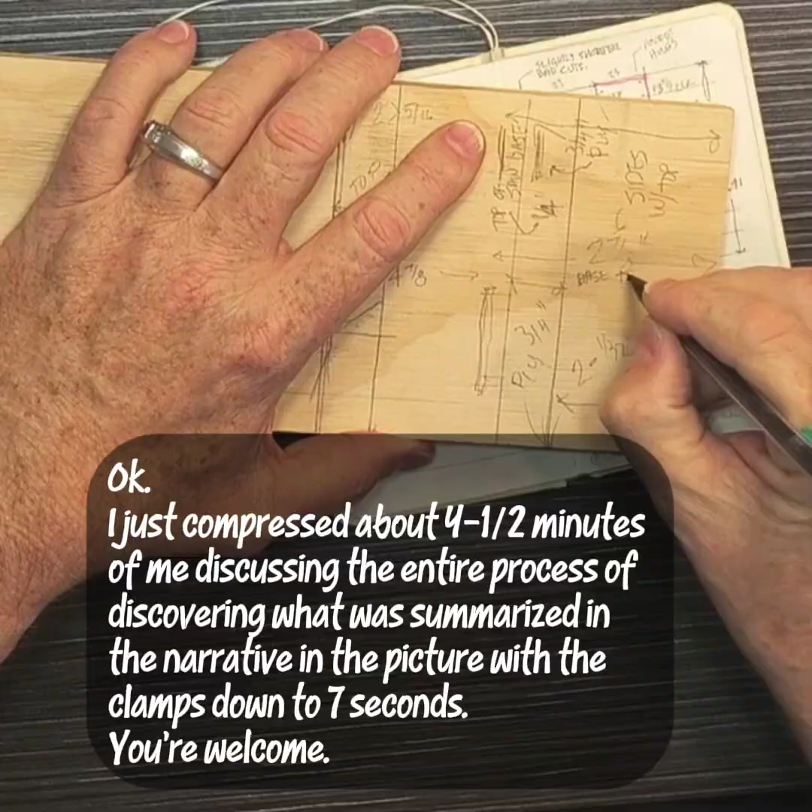This video is really just a way to show how my process moves from the measurements to a sketch, and from the sketch to what I'm going to build. So I start out with an initial base outside of 18 1/4. I'm going to add two 3/4 inch pieces to each side, so I'll end up with 19 3/4, which is plenty of room for the saw.

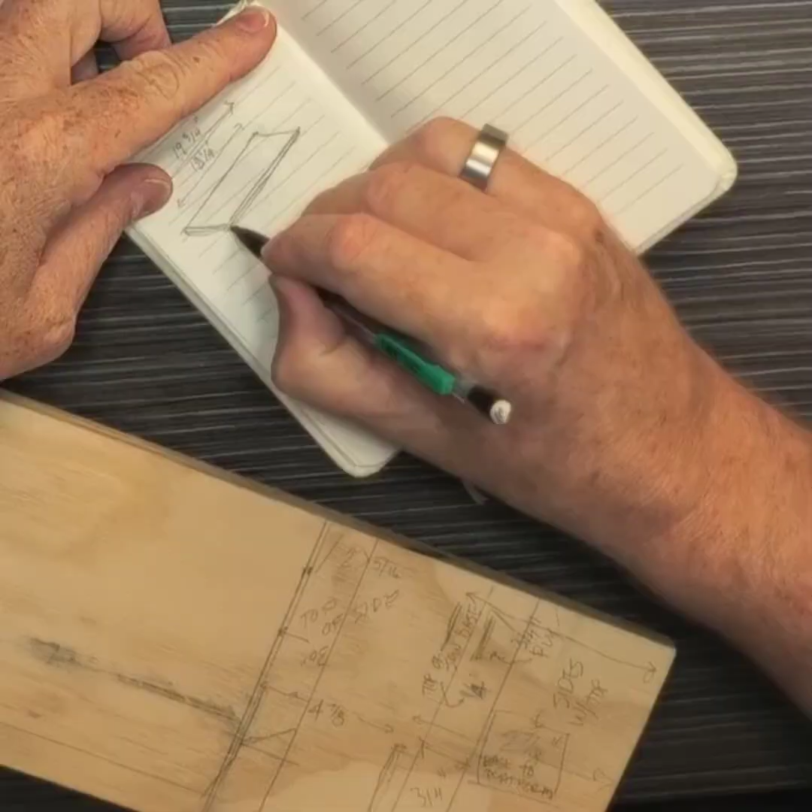What I think I'm going to do is make a piece that slides on the outside of the existing stand so I can mount the hinges to the outside, and put the base on a stand that's more appropriately 19 3/4 inches wide, plenty of room for the stand. I can bolt through into the bottom of that piece of 3/4 inch plywood, and I've got the 2 wings where I want them, right at the height of the platform of the saw.

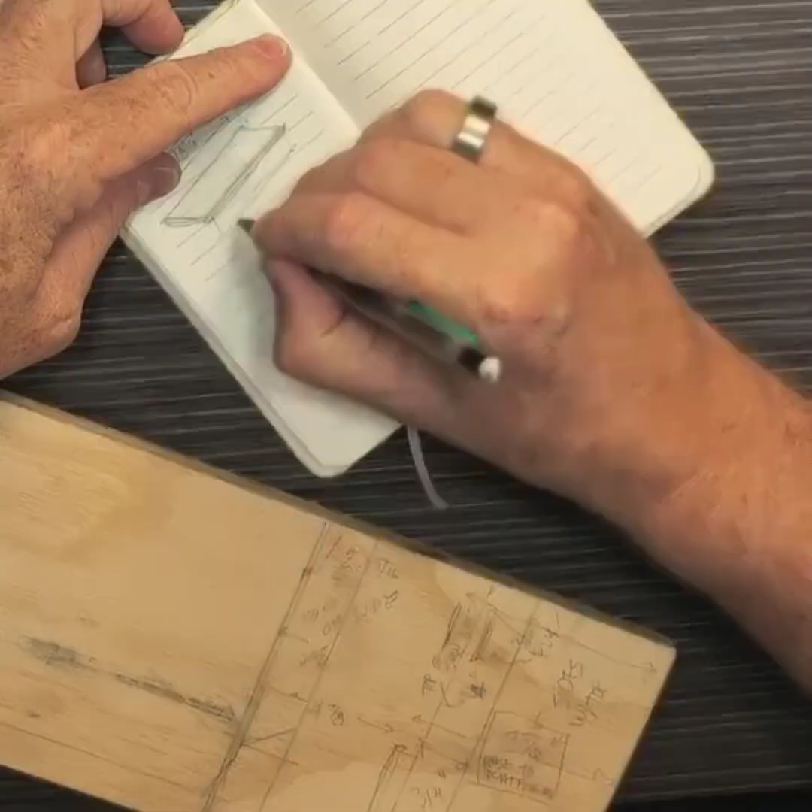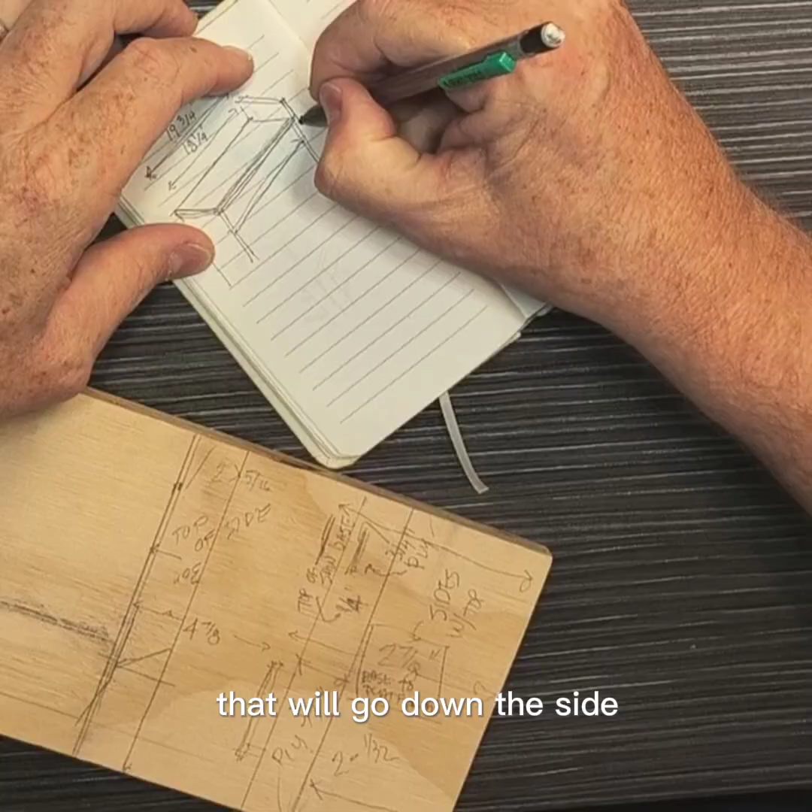I acknowledge I'll have this funny little space that's like 2 and something inches, but I can use that for maybe blades or templates or clamps or something. The sides are going to be up at about 2 7/8, or anywhere between 2 3/4 and 2 7/8. 2 3/4 is the actual dimension, 2 7/8 is a little bit higher. That gives me the ability to shim up or level up the bottom of the saw if I want to - I saw that on somebody else's build of the miter station.

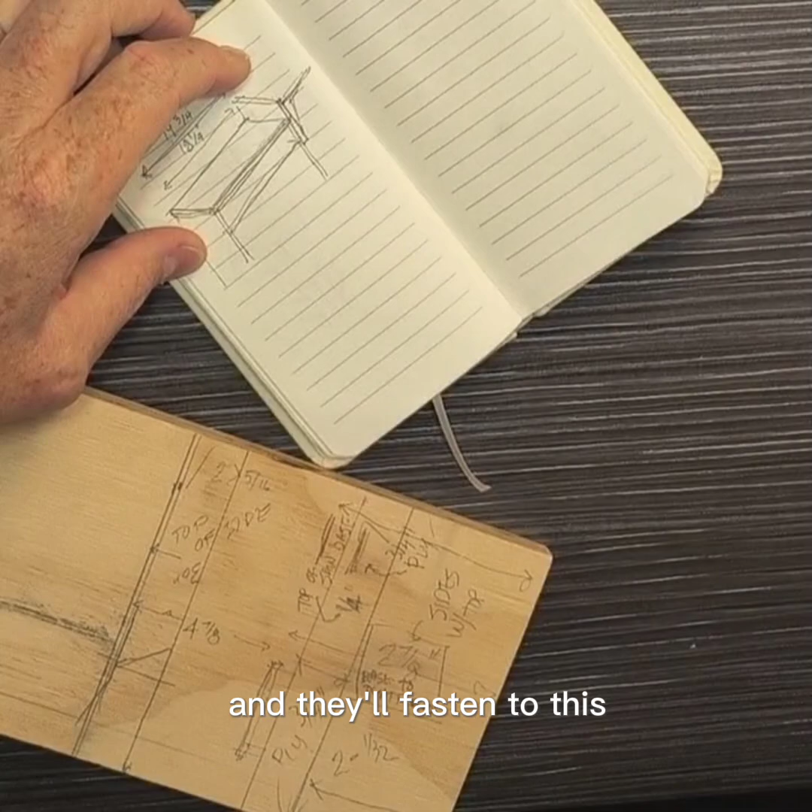The 6-inch panels on the side give me plenty of room to put my collapsible bracket hinges on. These are foldable hinges that allow me to put the wings down when I want to and leave them up firmly supported when I want to.

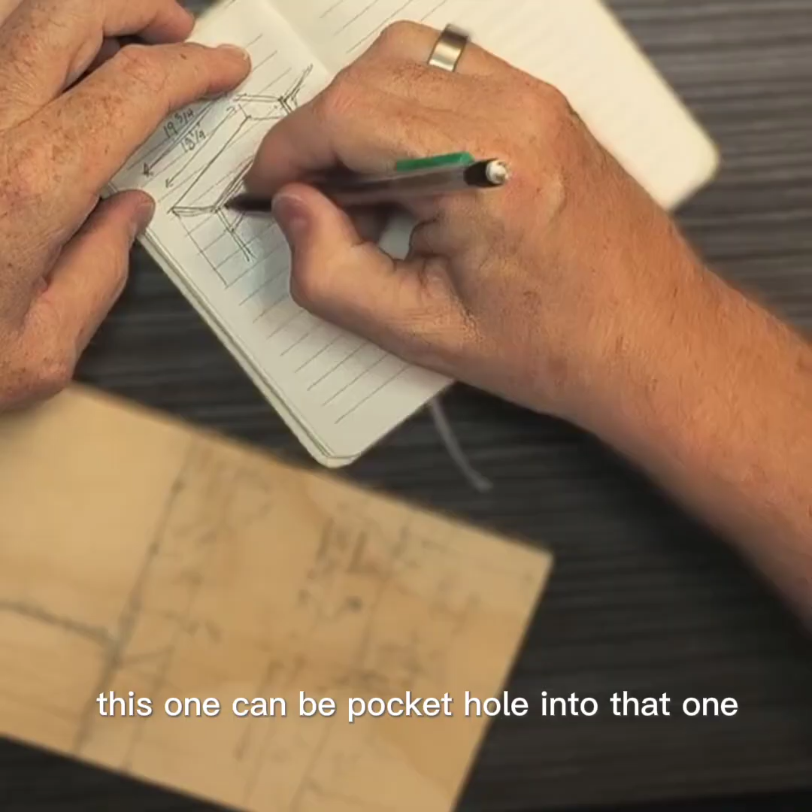I can also glue the 3/4 inch ply to the existing, giving it additional support, with plenty of room for small screws at the top and long screws at the bottom, or even a bolt through if I wanted to. So now I'm centering in on what I've got.

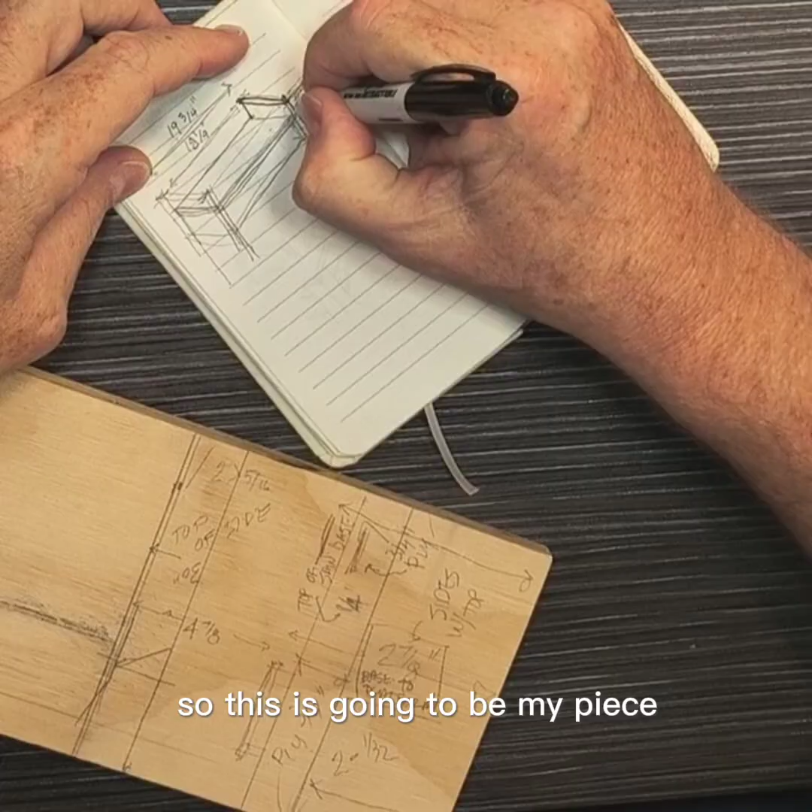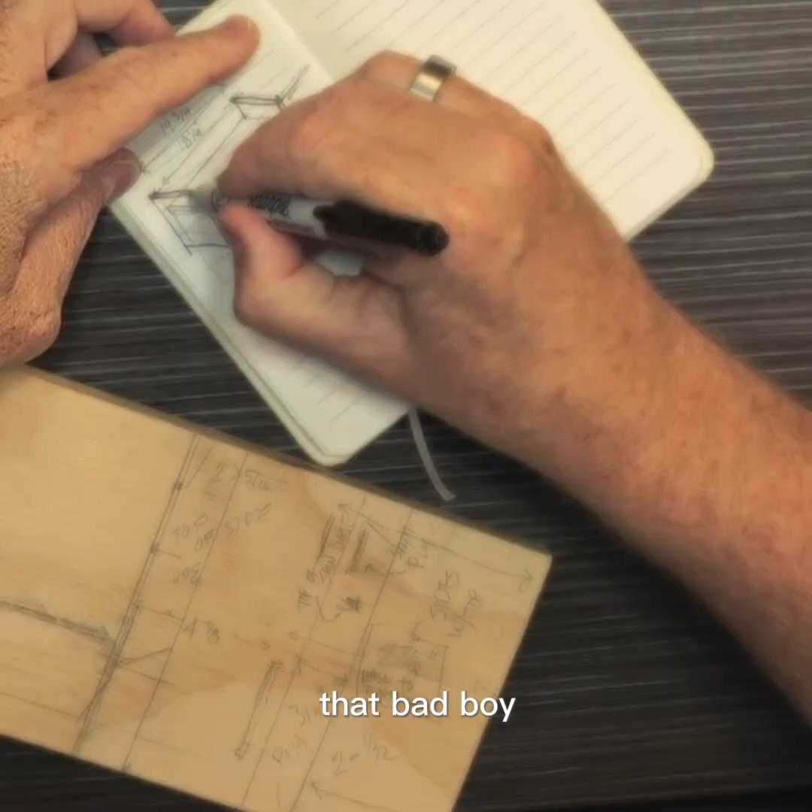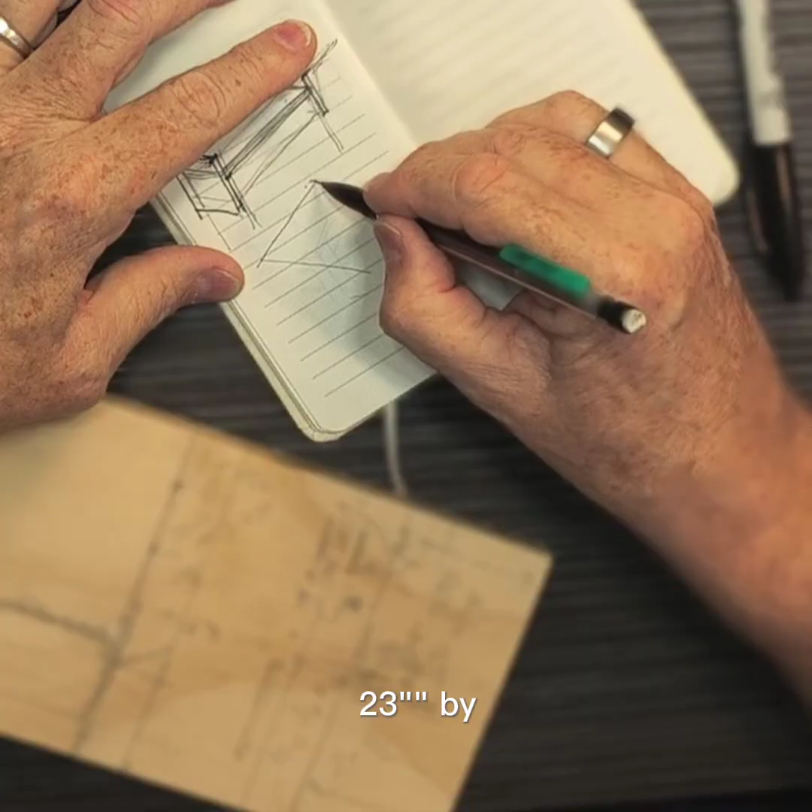So I've got this sort of H-shaped piece where the base of the saw is sitting on a piece of plywood that sits on top of the existing miter saw station. What's interesting is I just did again what was the problem in the last build - the way I've drawn this doesn't look like what it really is. It's 23 inches front to back and 19 3/4 side to side, which is much closer to square than it is the way I've drawn it.

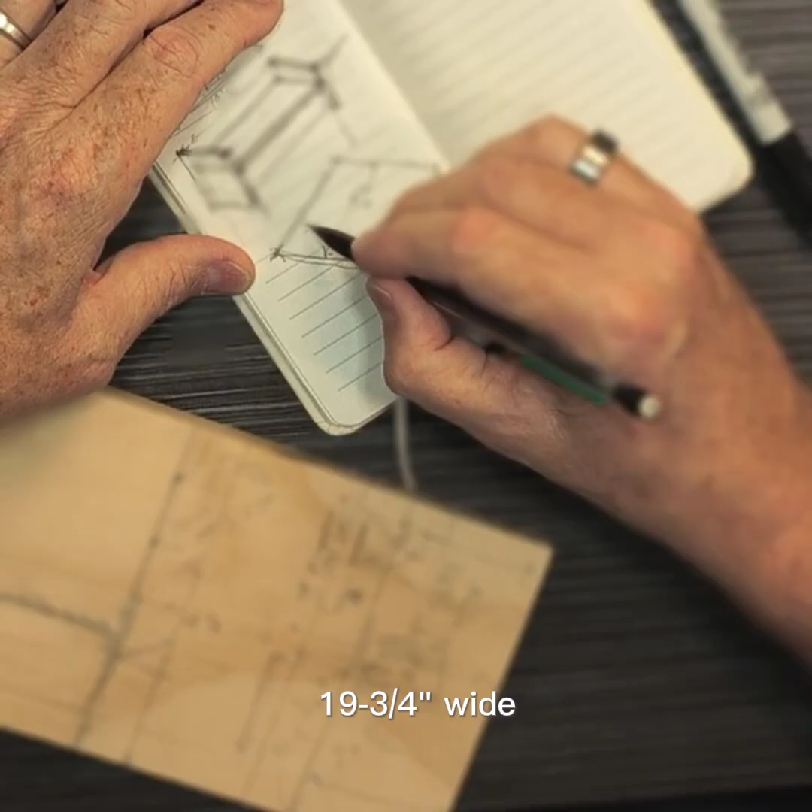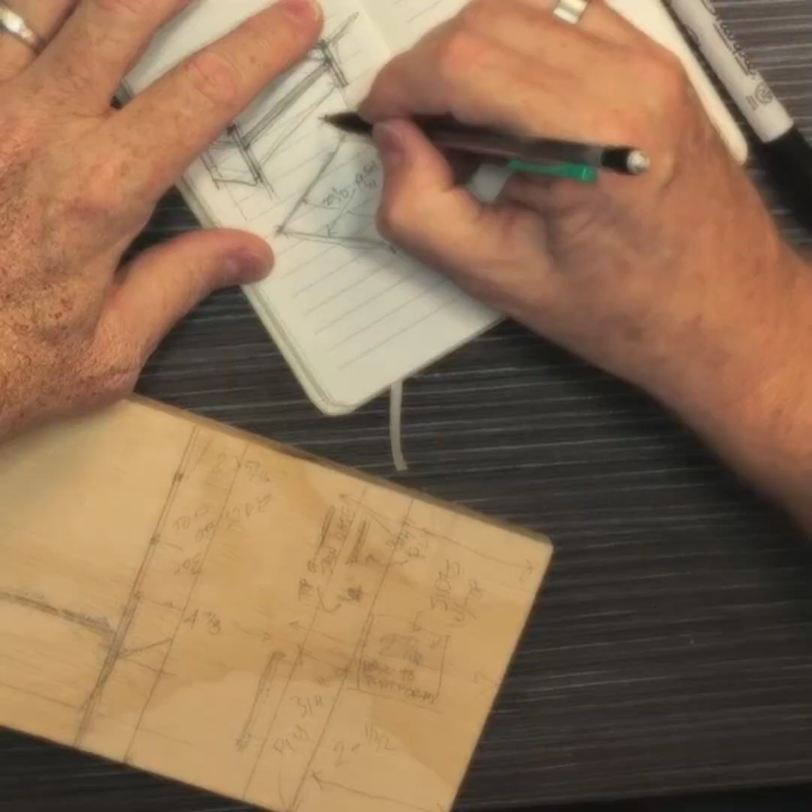It was really deceptive when I did it the other time, and really messed with me in terms of where I put my pocket screws. I think I'm going to do pocket screws on this one again, so I want to get this a little more squared up. The sides are pretty simple, 23 inches by 6 or 6.5, whatever I decide to do over there.

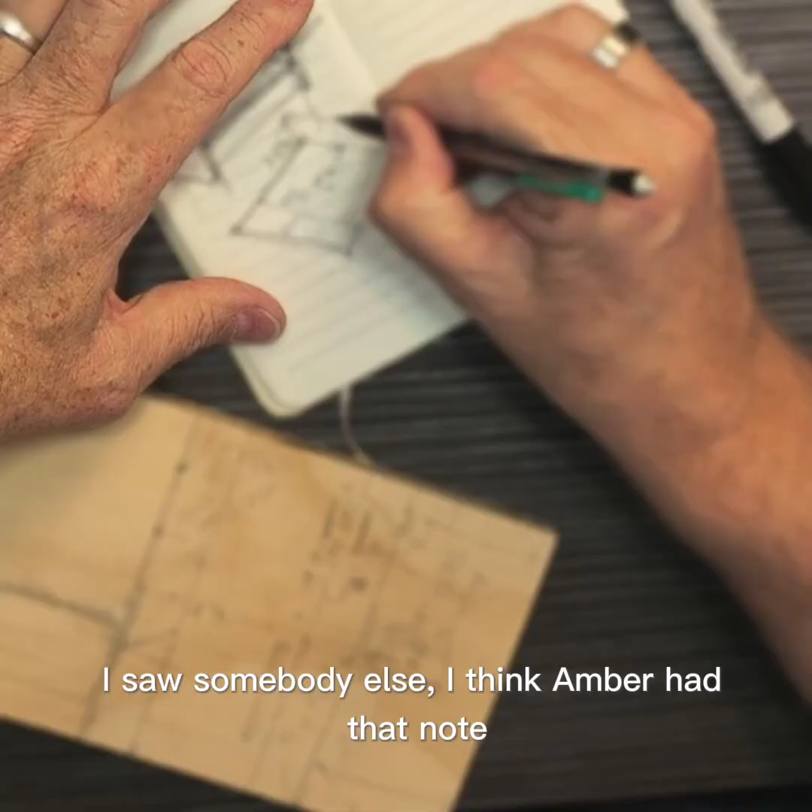The top piece I will put at exactly that 2 7/8 or 2 3/4, whatever I decide. Now that I've got the size of this piece pretty well figured out, I can move on and establish what my cut list looks like, exactly what I'm going to cut out of a chunk of plywood. Normally I'll just make it the width of what I'm working on, so 23 inches, and then show the other 2 pieces, labeling them as top or side so I don't have any question about what it's going to be.